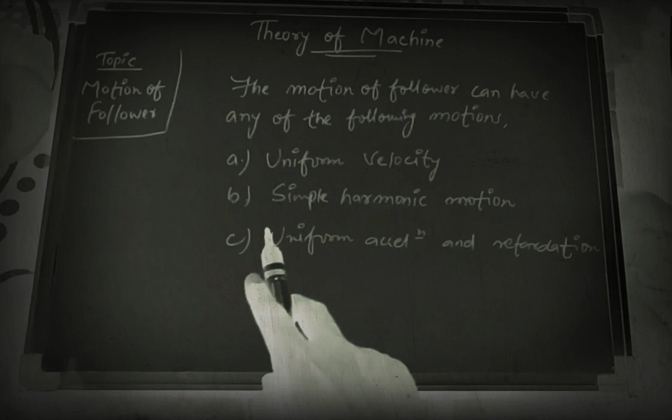So mainly the motion of follower can have any of the following motions. It can move through uniform velocity, that is the first case. It can move through simple harmonic motion, that is the second case. And it can also move through uniform acceleration and retardation, that is the third case.

So we will discuss today two of its motions, that is uniform velocity and simple harmonic motion. So let's get back to the first one, that is uniform velocity.

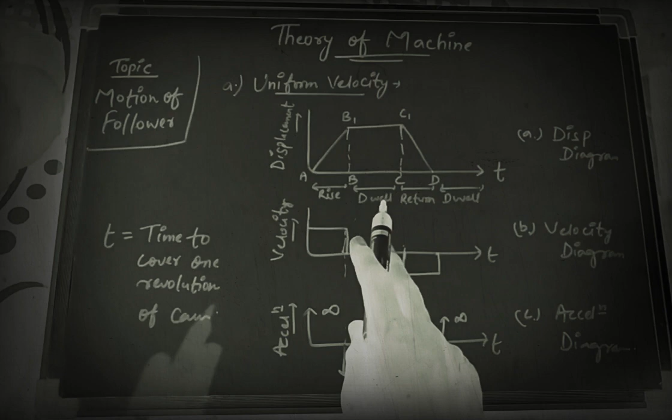So this is the velocity diagram or motion of follower according to uniform velocity. There are three graphs, A, B and C, which I have given here. A represents the displacement diagram, B represents the velocity diagram, and C represents the acceleration diagram.

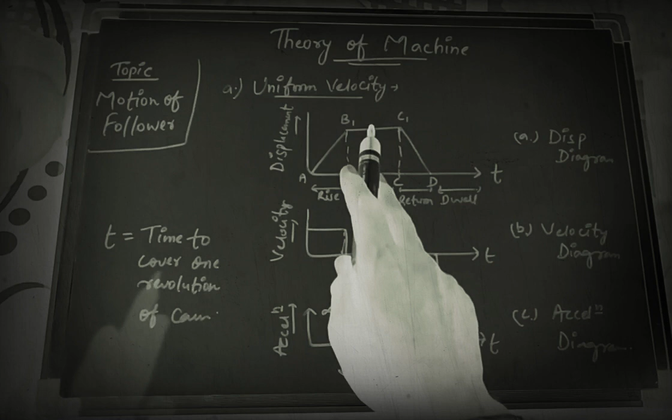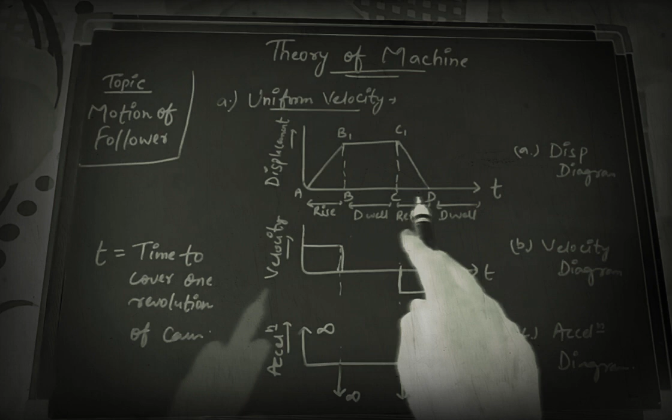Before starting with the graphs, let us first know what these axes denote. Along all three graphs, the x-axis, that is abscissa, denotes the time, which is the time to cover one revolution of the cam. That means the time taken for the cam to complete one complete revolution.

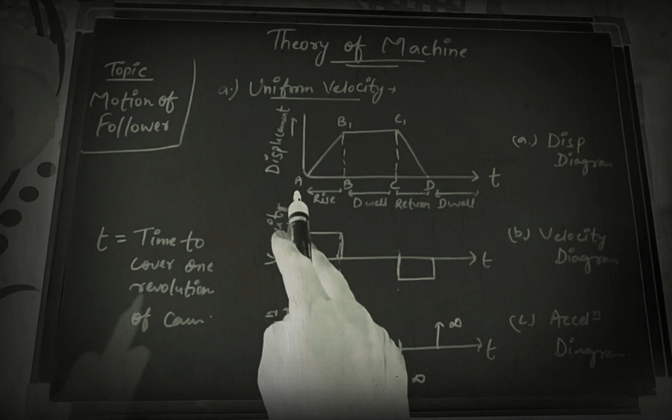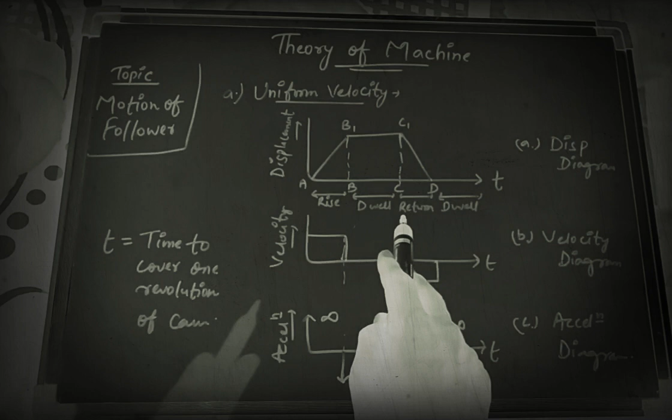Along the y-axis or ordinate, we have taken in the displacement diagram displacement, in the velocity diagram velocity, and in the acceleration diagram acceleration. So starting with the displacement diagram first, there are four cases: rise, dwell, return, dwell. Rise and return are the cases when the follower is moving, and we will get back to dwell.

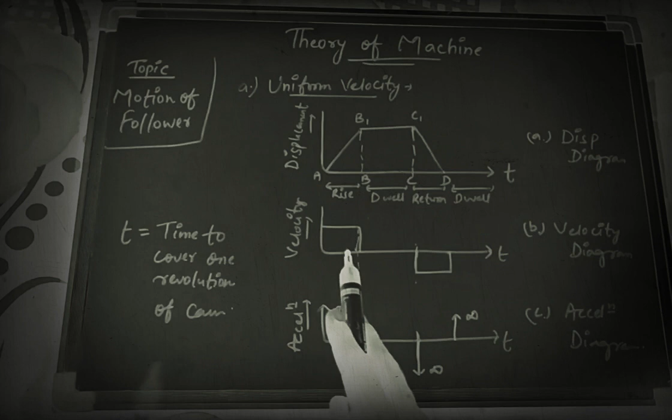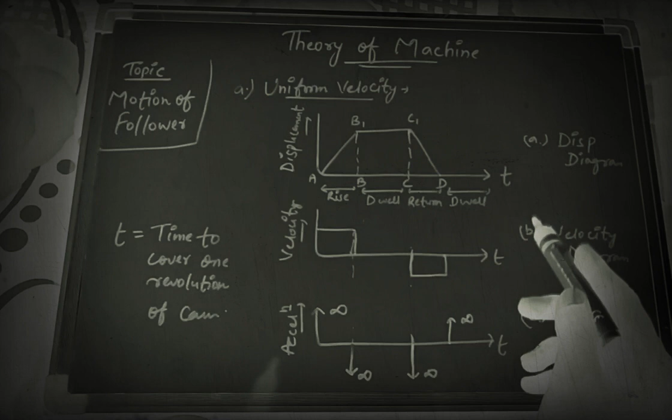So the first case is uniform velocity. As we all know, when an object moves with uniform velocity, its displacement changes at a constant rate. From our basics, when an object is moving with uniform velocity, its displacement must change uniformly.

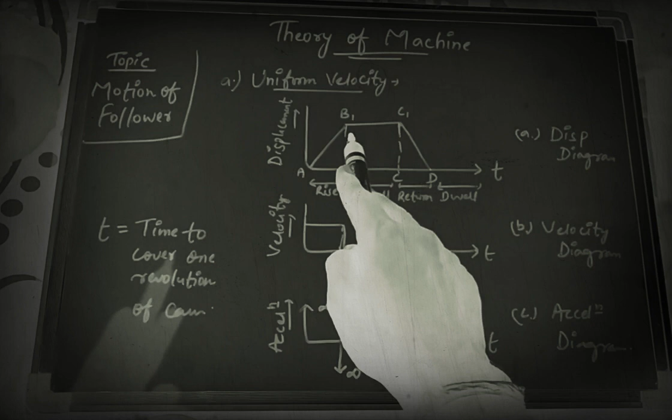So during the rise, denoted by AB1, and during the return, that is C1D, the graph should be a straight line, or rather a constant slope. That's why the graph AB1 and C1D is represented as a straight line of constant slope.

So these are the two denotations. The first one, AB1 line, and C1D line has a constant slope due to uniform velocity. Since in the case of uniform velocity, the displacement changes at a constant rate.

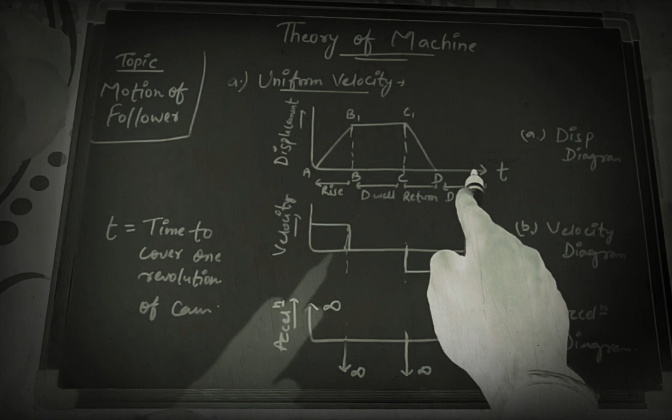But if you consider B1C1, or BC and DE, taking the last point as DE, it is simply showing a straight line, constant in time. This is because during this time the follower comes to rest. That means this is indirectly denoted as a dwell period.

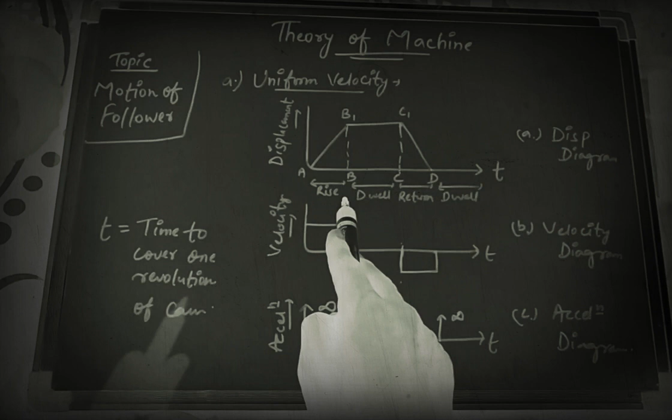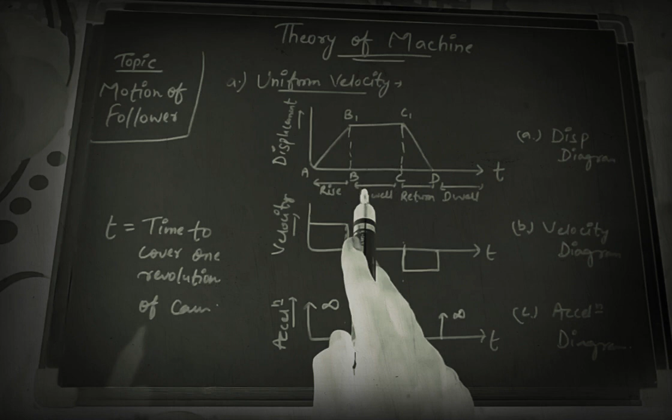So we can say during dwell, the follower remains at rest. That means the follower moves only during the rise period or the return period. Otherwise, during dwell, the follower remains at rest.

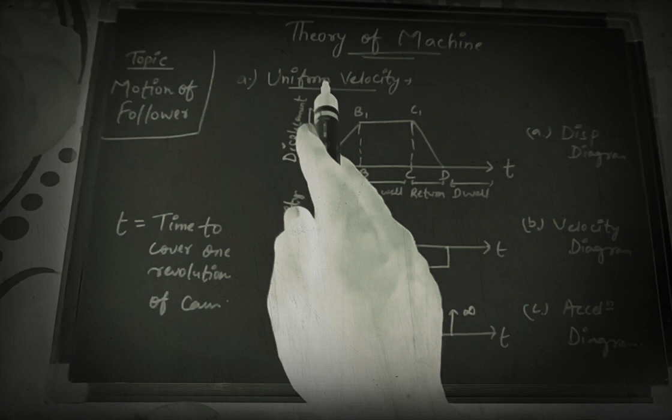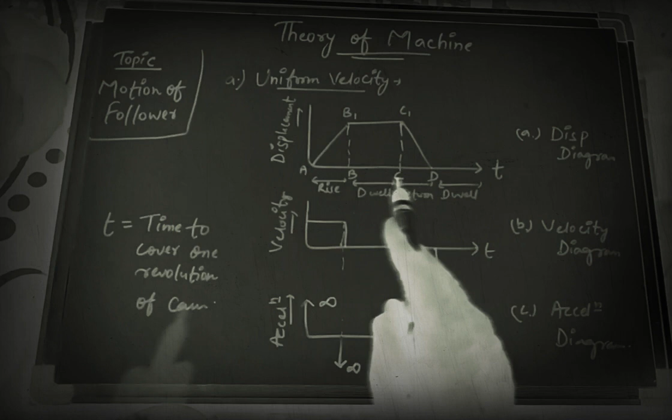So summarizing the whole displacement graph: the rise and return have a constant slope due to uniform velocity and constant rate of displacement, and BC and DE are constant lines along the displacement-time graph because during this phase the follower remains at rest. I hope you understand the displacement graph.

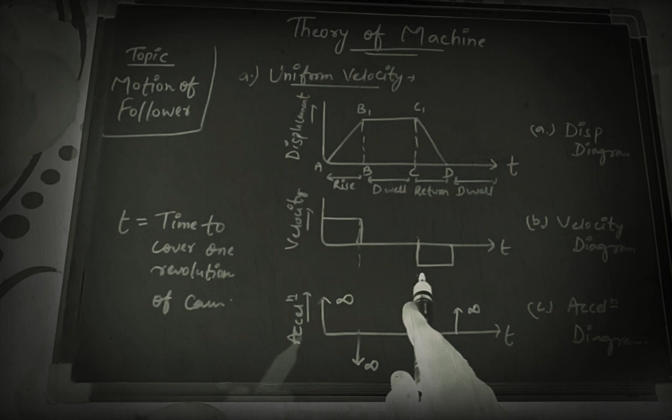Now coming to the velocity diagram. Considering the velocity diagram, since the velocity is uniform, it will be represented as a straight line. So we are adhering these lines and connecting them to the x-axis.

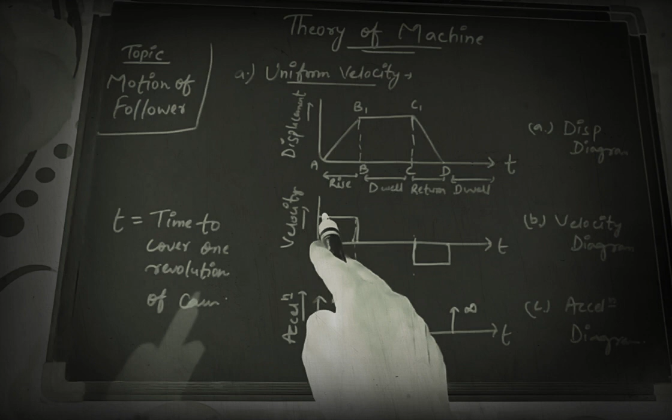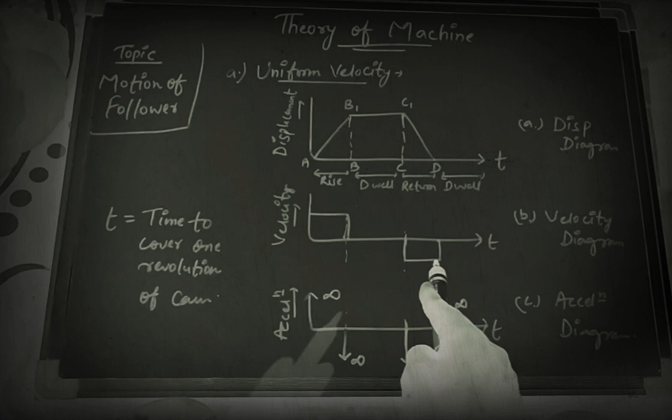Since it has uniform velocity, during its rise period AB1, it will be a constant velocity, as denoted by this figure, and during its return period, it will be in the negative y-direction but still constant. This indirectly shows the constant or uniform velocity diagram.

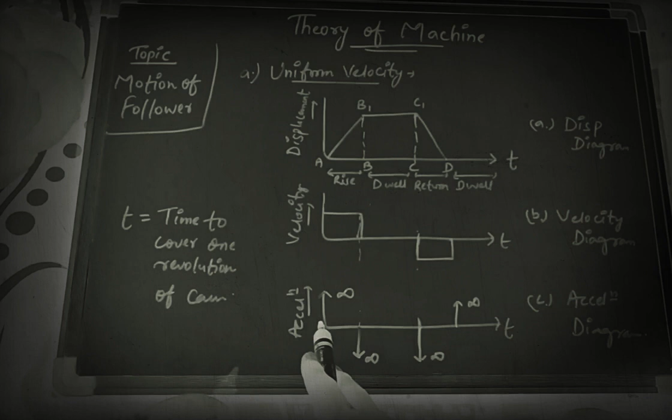Now coming to the third one, the acceleration diagram. Here you see that I have denoted all phases as infinite. It is shown as infinite because at the start and end of each stroke there should be a maximum velocity within no space of time.

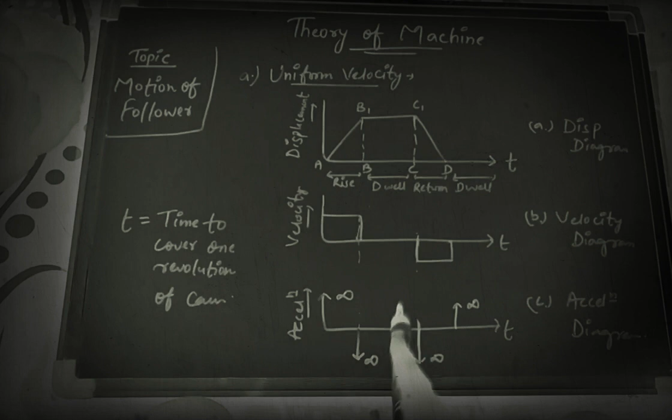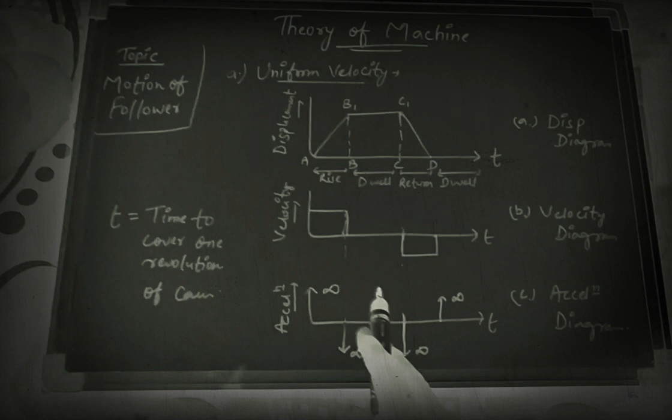So if it were not infinite, the velocity wouldn't be maximum. Due to this reason, the graph is shown as infinite. I'm repeating once again why this is shown as infinite: because if the velocity does not get back to its maximum, then the uniform velocity will not reach its peak point.

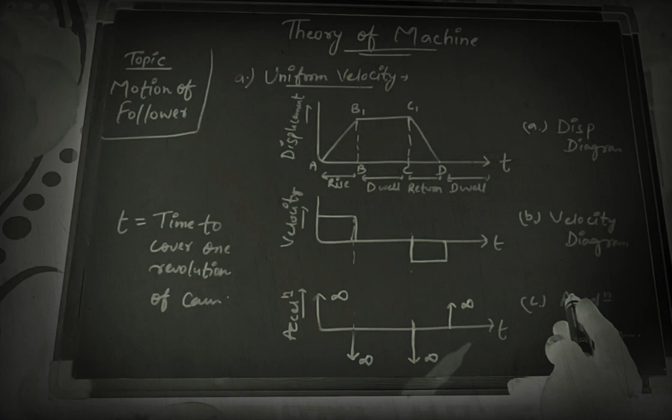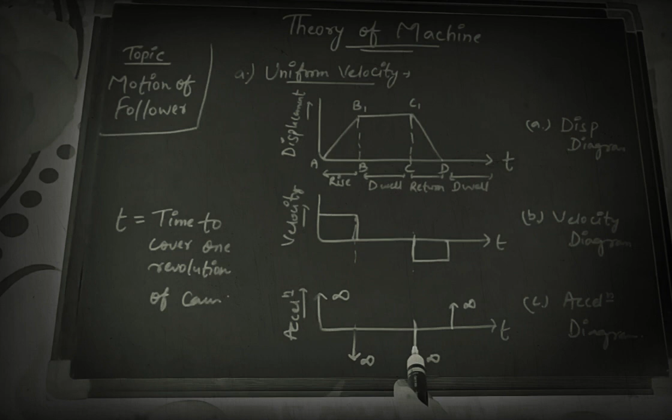Due to this, the acceleration is denoted as infinite during each stroke, at the starting of each stroke and also at the end of each stroke.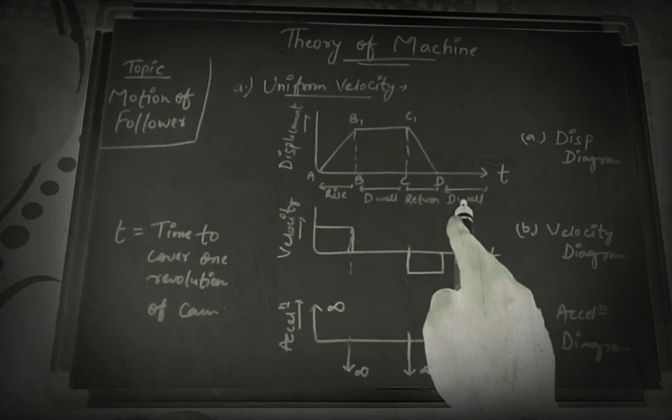So AB1 represents a constant slope. Again during the return period, during C1D, it will again have a uniform velocity and a constant slope. So again C1D has a constant slope. But in the case of BC and D to the maximum point, let us suppose that is E, it is a constant line, so it is a straight line.

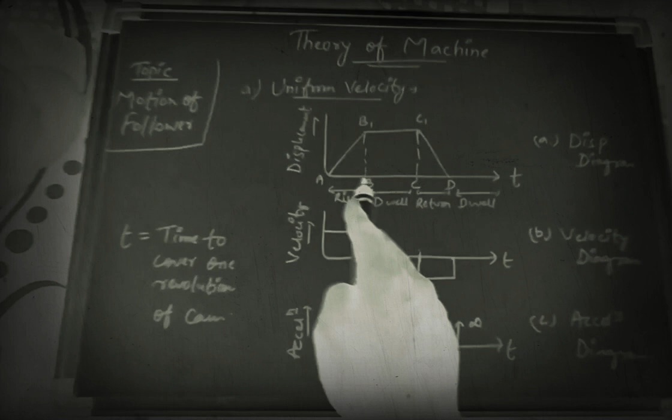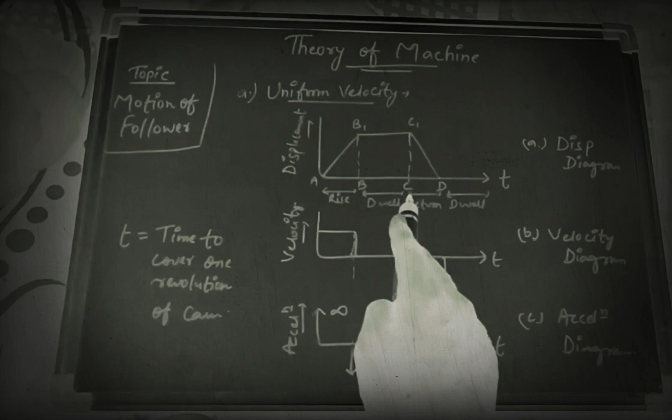It is due to the fact that at this phase of time the follower remains constant. So during AB1 the follower is moving, during C1D the follower is moving, but during BC or B1C1 or D to the maximum point, the follower remains at rest.

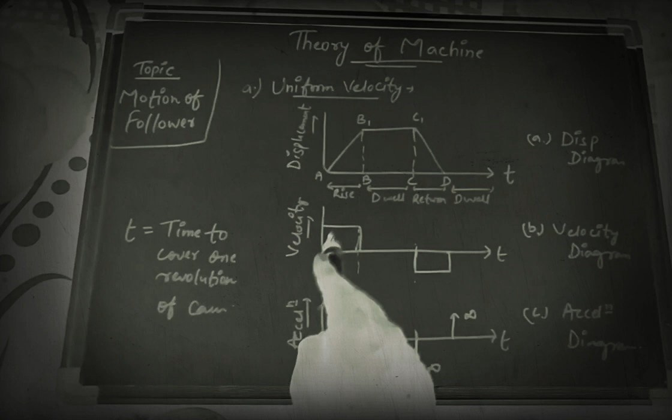If we get back to the second graph, it is a case of uniform velocity, so the velocity will be uniform, that will be constant. It is represented by a constant line. As it is a rise case, it is taken as positive on the y-axis, and at the second time it is a return case, meaning it will have a negative velocity but it will also have constant velocity.

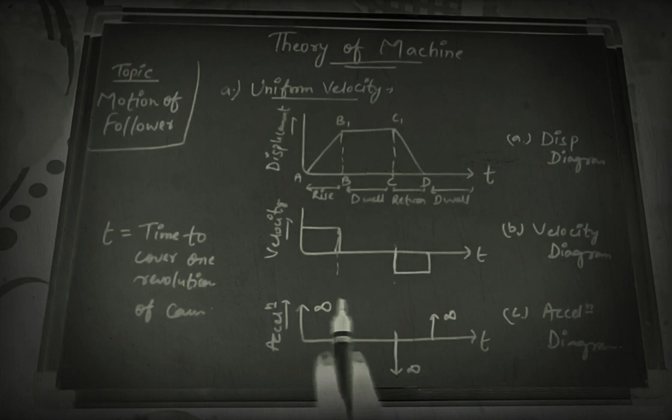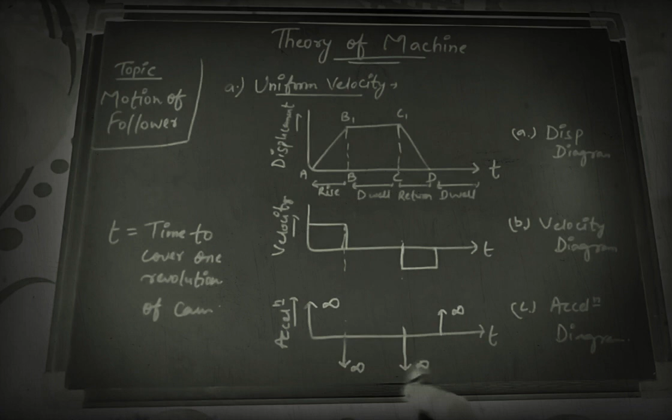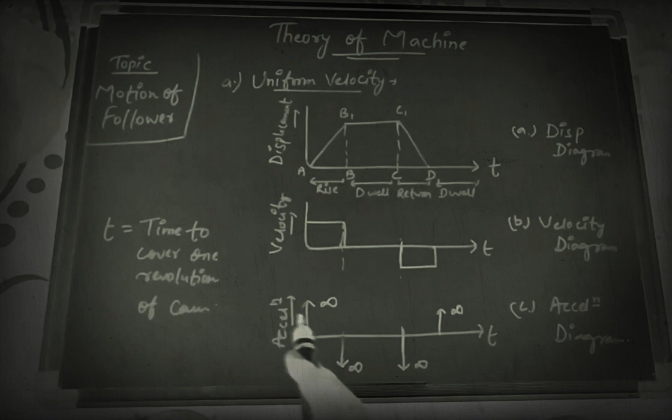And the third case is shown as infinite due to the fact that it will have to gain a maximum velocity with no phase of time. It will not gain so much time, so with no phase of time it will have to gain maximum velocity. This is only possible when the acceleration is infinite at the starting of each stroke and at the end of each stroke. I hope you understand the motion of the follower due to the case of uniform velocity.

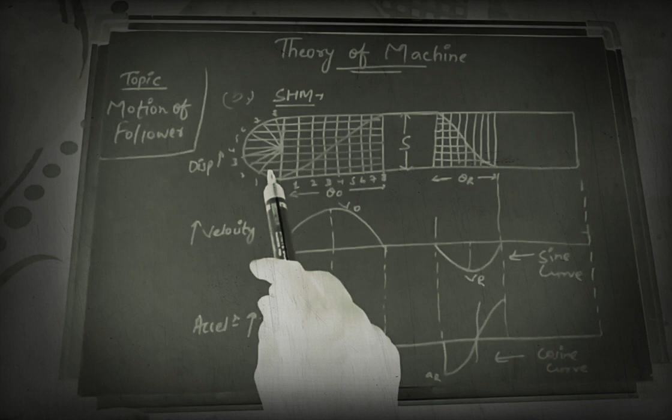Now coming back to the second topic, that is the motion of the follower due to SHM. Before starting this, you have to make a few observations. In the previous step we simply plotted a graph: in the y-axis we took displacement, in the x-axis we took time, then velocity-time, then acceleration-time.

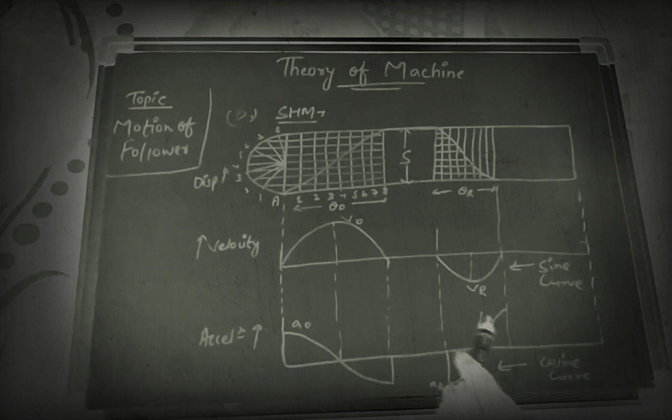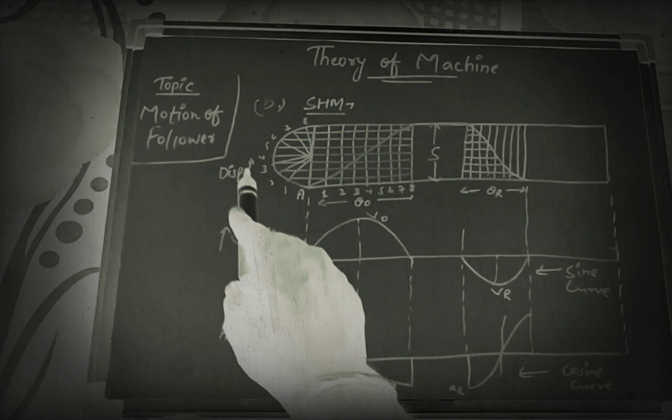In this case we have to take a different arrangement. While considering the first case, we have to make a geometrical arrangement: you have to consider a semicircle at the left end, or at the starting end, of the stroke during the displacement-time graph. So we have made a semicircle and plotted numbers, 1, 2, 3, 4, 5, 6, 7, 8.

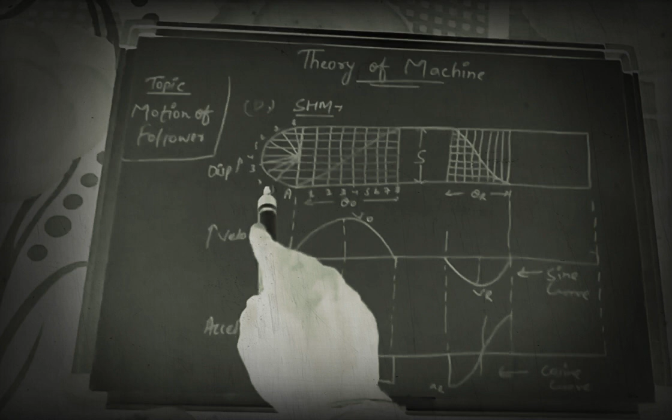You don't have to put exactly 8 slots; you can take any number of slots. But whatever number of slots you take on the semicircle, you have to plot that same number of slots on the axis dimensions, both at the starting end and at the end. So we have represented theta-0 and theta-r. Theta-0 means at the starting stroke, and theta-r means at the return stroke. This is the initial stroke, when the cam is moving in the forward direction, and this is the return stroke, when the cam is rotating in the returning direction.

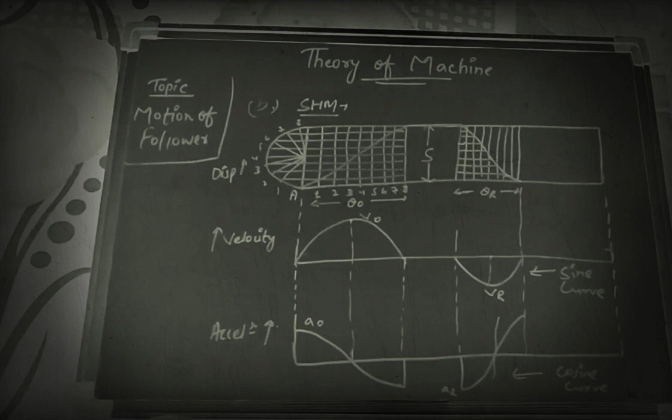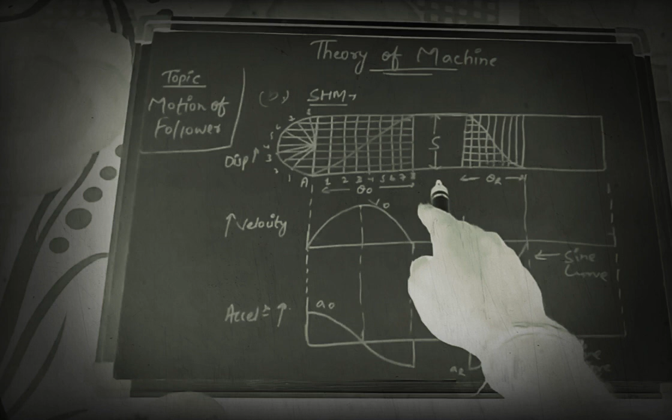So while considering the displacement-time graph, we see that during the initial stroke, the forward motion of the cam, it is a constant slope continuously increasing, and at the dwell time, that is when it reaches the maximum displacement represented by S, it is the case where it reaches maximum displacement, and for a certain phase of time it has constant displacement. This phase of time is known as dwell time in this case of follower motion.

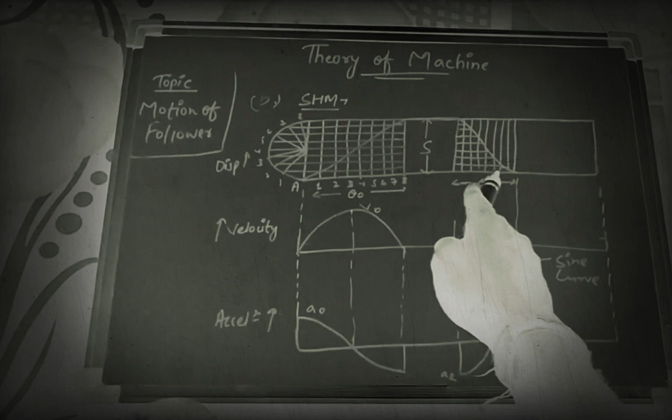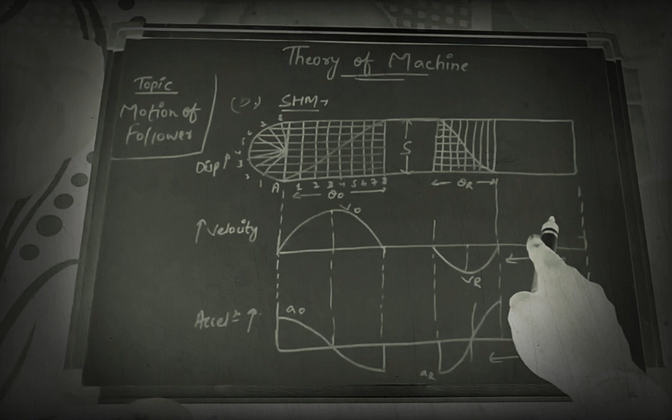And again, after reaching its maximum value of displacement, it comes back to its minimum value, and at the end it reaches zero. That means during the return stroke it goes to zero, from maximum to minimum value. But we see that during the forward motion it takes more time compared to the return stroke.

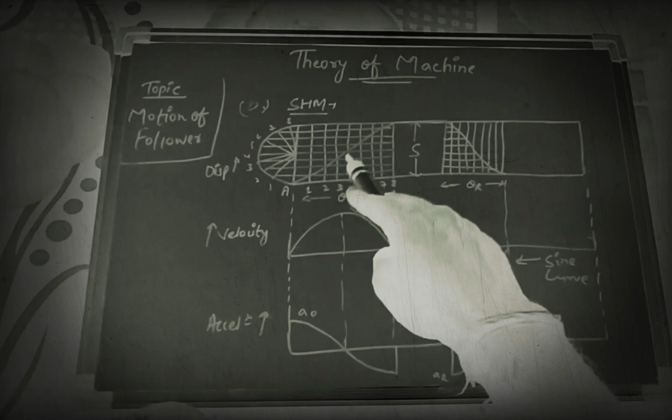That's why here the graph or the plot is taken as more curvilinear compared to this one. So the initial phase is the forward stroke, and this is the case of return stroke.

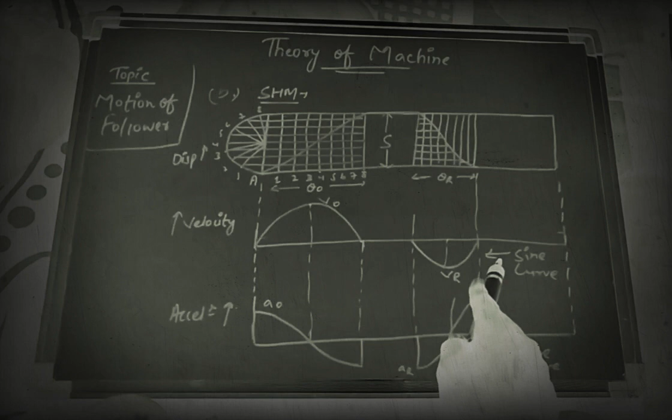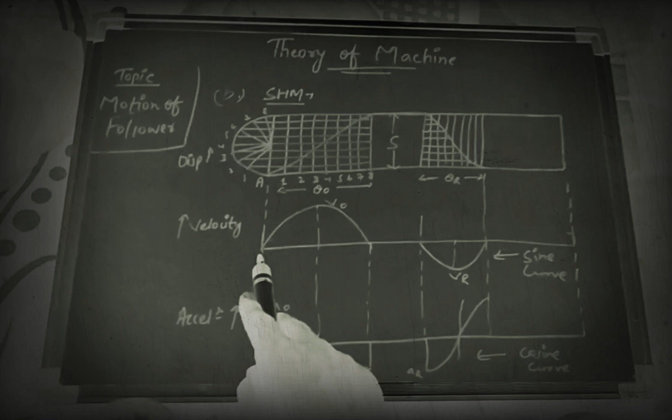Now coming back to the velocity diagram, since it is a case of simple harmonic motion, we have to consider the velocity diagram as a sine curve and the acceleration time graph as a cosine curve. So you all know the main difference between sine and cosine curve: in the sine curve, the curve will pass through the origin, and in the cosine curve it will never pass through the origin.

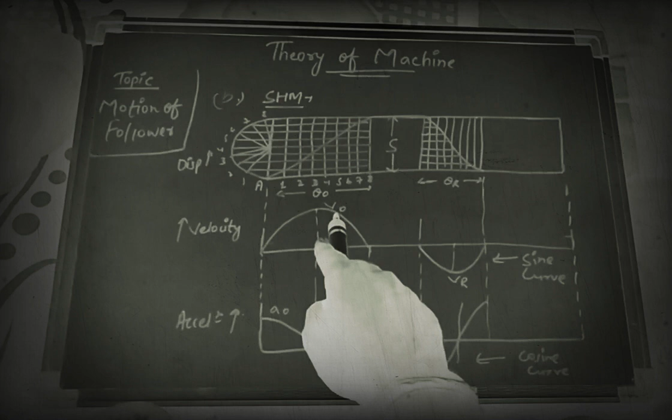Due to this fact, it is drawn from this point, it reaches its maximum value, that is V0, the maximum velocity during its forward stroke, and it again reaches to zero. That means it is starting from zero, reaches maximum value at the mid frame, again reaches zero at the end of the stroke.

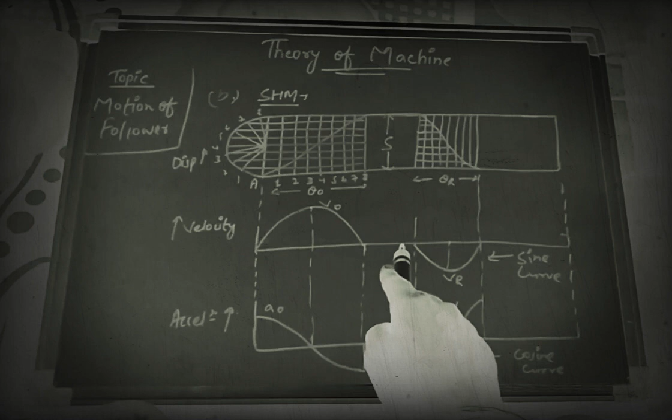Again during the return time it is starting from zero, reaching its maximum value towards the negative direction, represented by VR, and again coming back to zero. So through the velocity diagram we can assume that at the starting of the stroke it is zero, at the mid frame it reaches its maximum value, and again at the end of the stroke it reaches zero.

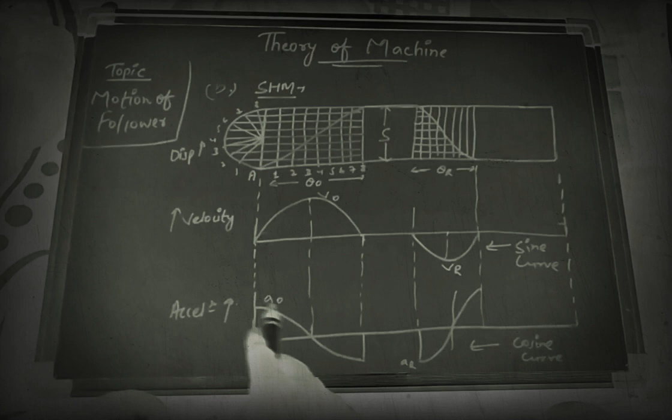Again if we go by the acceleration time graph, we can see it is taken as a cosine curve, so it is not crossing through the origin. So in the acceleration time graph, at the starting of the stroke it has maximum value, at the mid frame it reaches zero, and at the end of the stroke it again reaches its maximum value, represented by A0 during the forward stroke, and during the return stroke it is taken as AR.

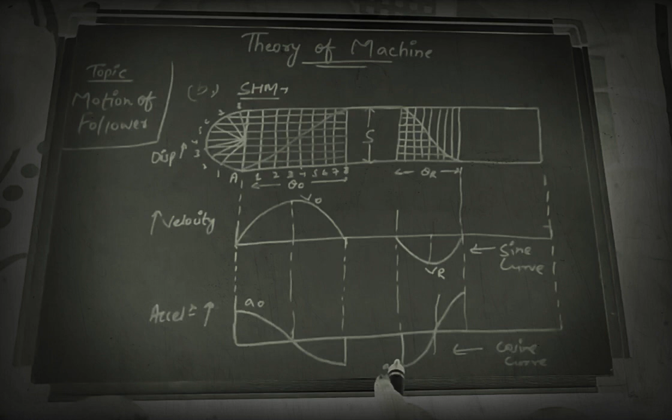So again, at the starting of the stroke it is maximum value, at the mid frame it becomes zero, and at the end of the stroke it again reaches its maximum value.

So the difference between uniform velocity and SHM is that in the uniform velocity case we simply put a graph with a constant slope, but here that is not the actual case.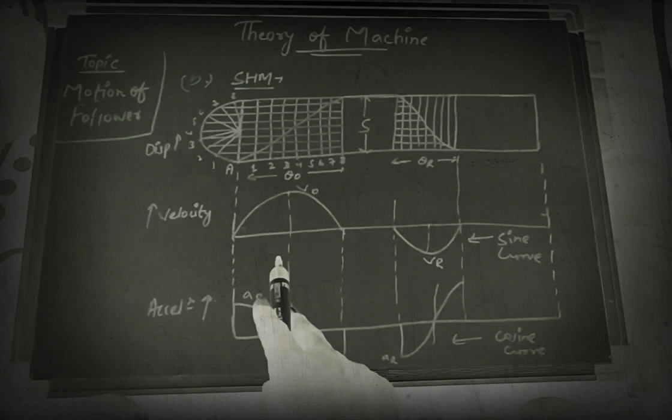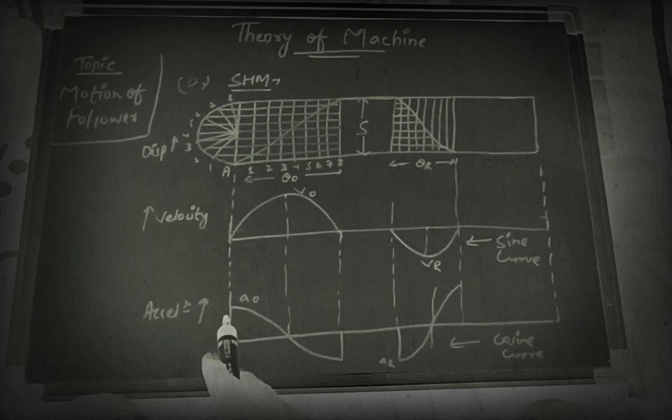During the velocity time graph it will start from zero, at the mid frame it reaches its maximum value, and again reaches zero at the end of the stroke. During the acceleration time graph it will start from maximum value, at the mid frame it becomes zero, and at the end of the stroke it again reaches its maximum value.

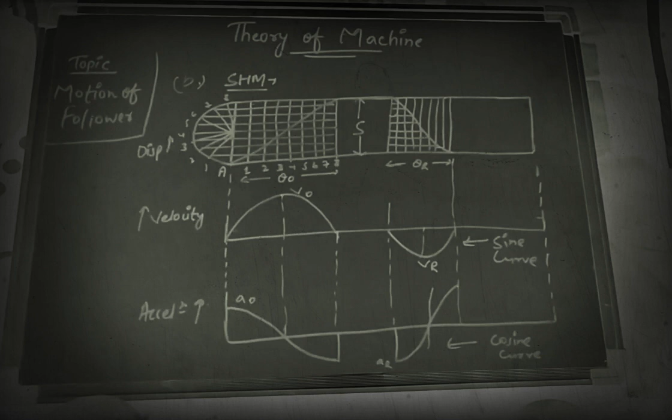Now I will give you some formulas of velocity and acceleration. Please write them down. These are the main formulas which we get through SHM. V0 or A0 denotes the out stroke, that is forward stroke, and VR, AR represent the return stroke.

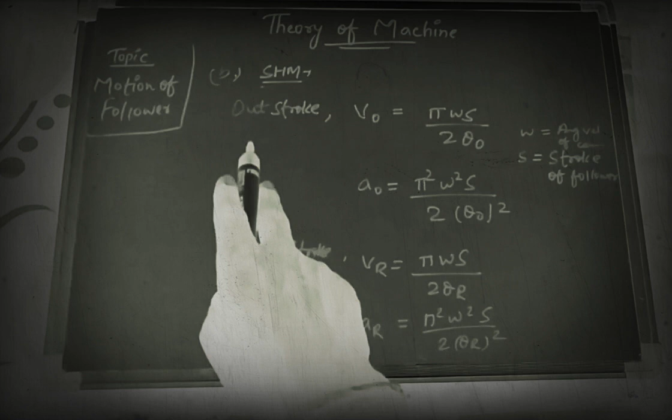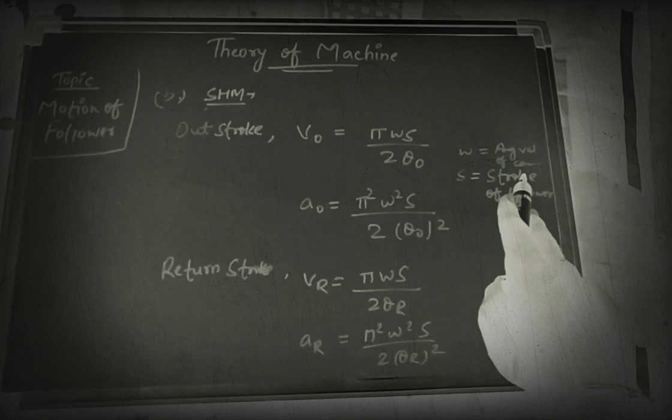The velocity during out stroke will be pi omega s by 2 theta naught, where pi is a constant value taken as 22/7 or 3.14, omega is the angular velocity of the cam taken in radian per second, s is the stroke of the follower, and theta naught is the angular displacement during out stroke.

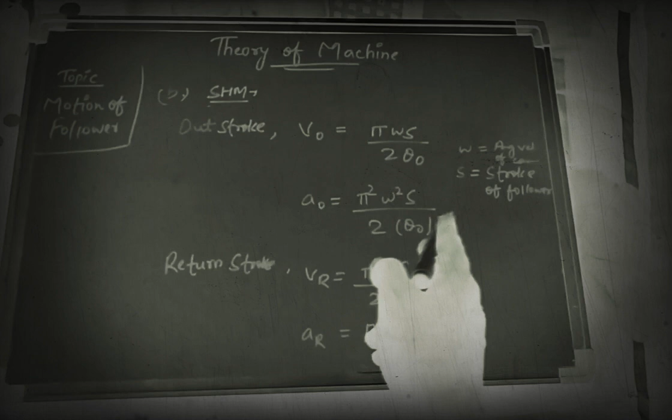Similarly, the acceleration will be pi square omega square s by 2 theta naught squared. Write down these formulas and remember they apply during SHM; they will help you in solving numericals during the return stroke, and also help in dimensioning the cam while designing it.

Now coming back to the return stroke: VR will be pi omega s by 2 theta r, and AR will be pi square omega square s by 2 theta r squared. Similar to both, just replace theta naught with theta r; otherwise all the formulas are the same. Write down these formulas also.

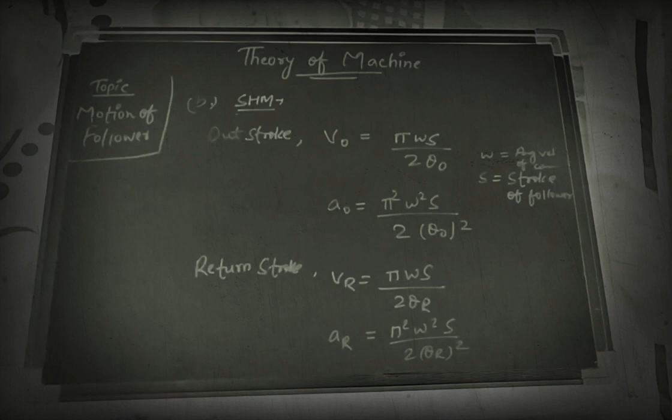I hope you understand both cases, that is motion of follower due to uniform velocity and motion of follower due to SHM. Okay, thank you.